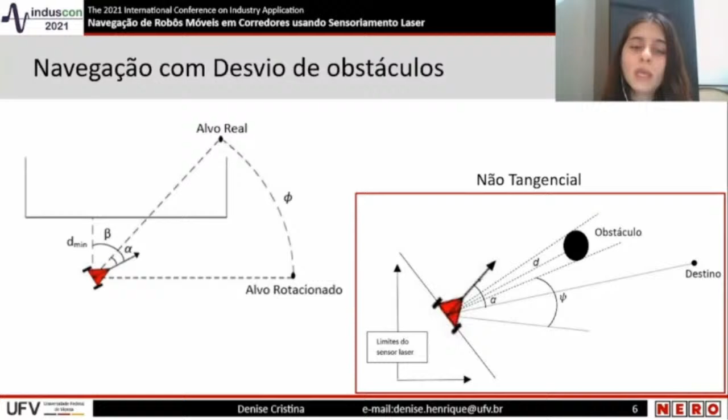Neste caso, as informações obtidas através da varredura laser são utilizadas para a determinação das regiões livres do ambiente. Será escolhida a região livre que possui uma abertura suficiente para a passagem do robô e que, além disso, apresente um menor erro de orientação em relação ao destino.

A emulação do sensor laser é realizada através do software MATLAB, levando-se em consideração o seu princípio de funcionamento, que se baseia no tempo de voo para a determinação das distâncias.

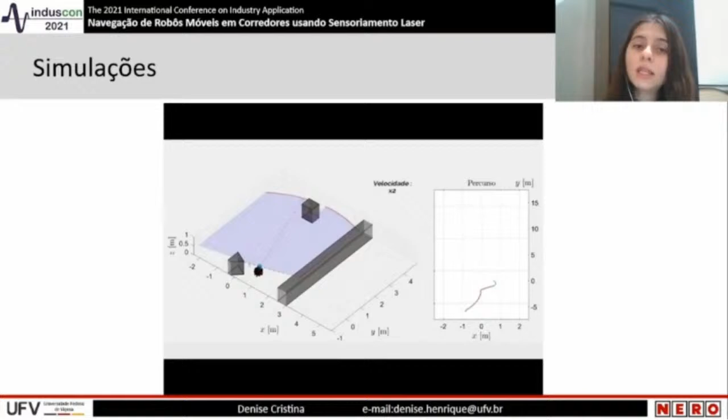O desempenho do sistema é analisado a partir das simulações, avaliando o comportamento das variáveis de estado ao longo do tempo. É importante destacar que espera-se que essas variáveis tendam assintoticamente a zero, evidenciando a estabilidade do controlador de navegação em corredores. Essa foi uma breve explicação do trabalho.

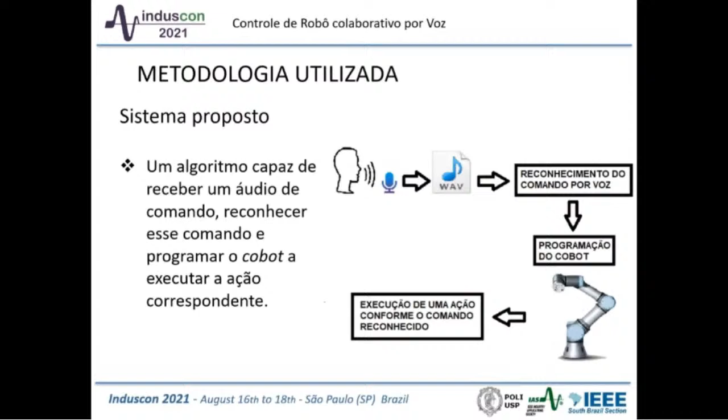O desenvolvimento do sistema proposto foi dividido em duas partes principais. A primeira, o reconhecimento do comando por voz, foi desenvolvido utilizando técnicas de aprendizado profundo, mais especificamente a CNN, a rede neural convolucional. Com relação à parte de programação do robô colaborativo, foram desenvolvidas quatro funções para controle do robô.

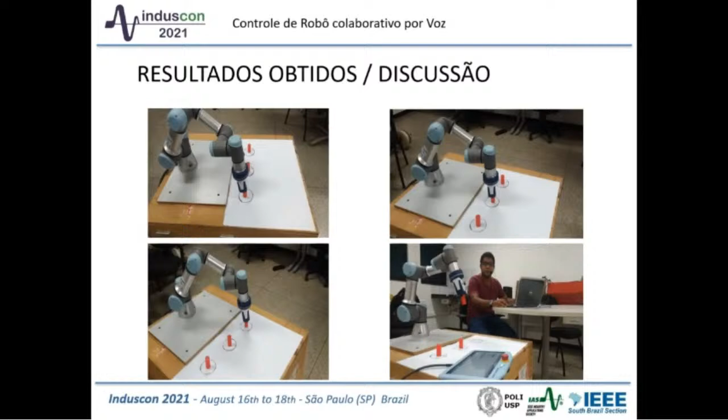Resultados. Durante a realização dos testes experimentais, como está demonstrado aqui nas figuras, foi possível observar que o sistema funcionou conforme esperado, ou seja, o sistema de controle proposto obteve êxito em reconhecer os comandos de voz corretamente e programar o cobot a executar a ação correspondente.

Conclui-se que a utilização de um sistema de controle por reconhecimento de voz pode tornar a programação de um cobot mais intuitiva e dinâmica, ao mesmo tempo que acrescenta o elemento com consciência humana no ambiente colaborativo.

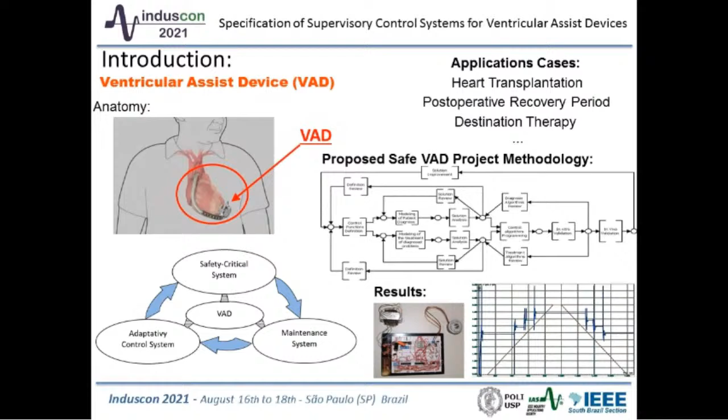Sensors to indicate blood pressure, blood flow, body temperature and cardiac frequency are necessary. To build a robust ventricular assist device, the proposed methodology uses HACCP methodology to declare the scenario and find potential risks. Concepts based on Bayesian networks are used to model the patient diagnosis algorithm. Petri nets are used to generate the ventricular assist device control algorithm, and safety instrumented systems ensure the device's system security.

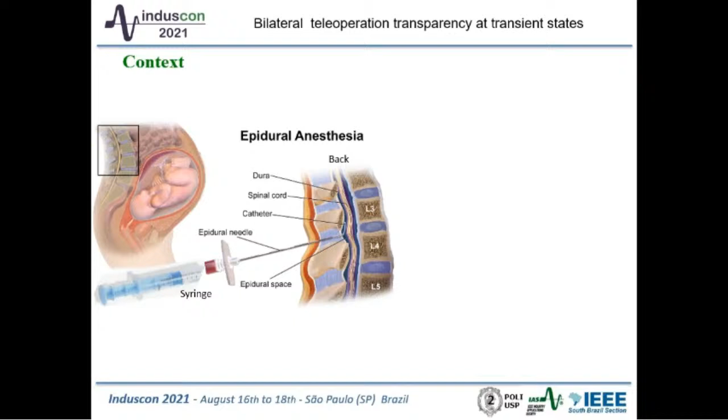Let us talk about the context. To perform an epidural, a needle is inserted through the patient's skin and guided between the patient's vertebrae to the yellow ligament, which is resistant. We want to enhance the sensation of the anesthetist. Thus, we propose to use a bilateral teleoperation system, done with a back, a needle, a syringe, and an epidural space modelized by this tube.

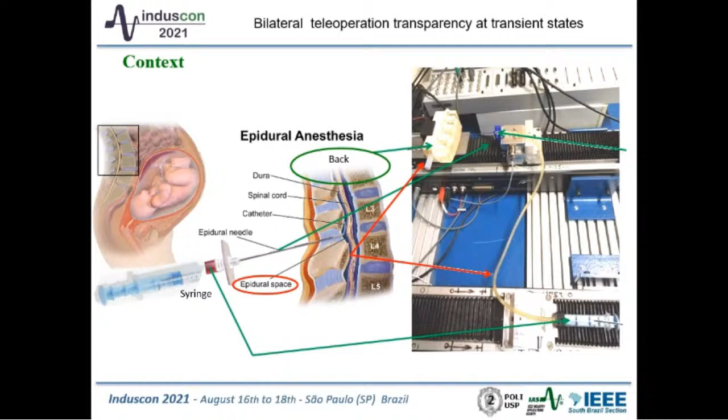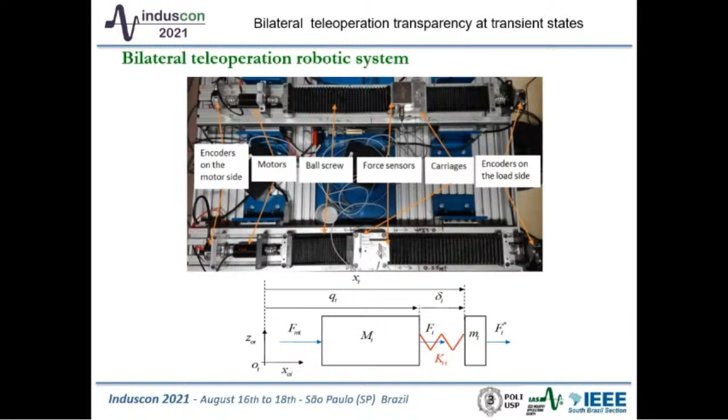In this presentation, we will not talk about the problem of needle insertion. The subject will be only about the bilateral teleoperation robotic system. This system is made of two similar robots. The modelization will be explained. Robot 1 is in contact with the operator, and Robot 2 is in contact with the environment.

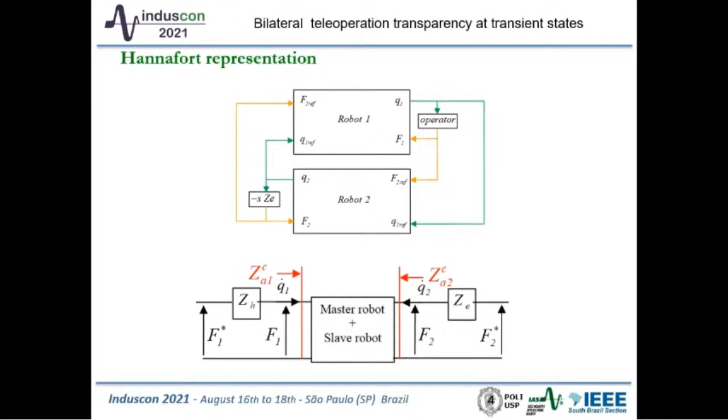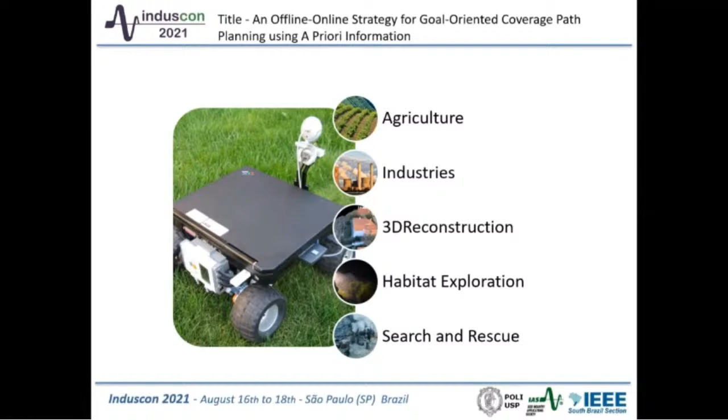Mobile robots in recent times have been used in various fields like precision agriculture, surveying of industries, 3D reconstruction, habitat exploration, search and rescue missions. In all these applications, at heart lies the problem of coverage path planning, which can be defined as a process of computing a path for a mobile robot such that it can explore every location in any given area. In recent times, there are many tasks like nuclear decommissioning, where the robot has to plan the coverage path and also reach the static target efficiently and effectively.

In this paper, we have proposed a novel strategy which has an offline stage as well as an online stage. In the offline stage, we take the architectural layout, which could be in the form of a grid map or a floor plan, and divide it according to the openings and construct a roadmap such that the robot can move from the start position to the goal position, also exploring at the same time.

The coverage path or the exploration path is computed in the online stage, where we build the occupancy grid from the given position. We extract the set of frontiers and select a frontier based on the roadmap where a set of regions are defined. Once the target is found, we stop exploring.

This novel strategy was evaluated using 3 environments in simulation. The first one was a nuclear site, which is the office of a nuclear site. The second is an environment proposed in the literature, basically a corridor which could be prone to debris in an extreme environment. The third was a floor shop, or an industrial manufacturing environment.

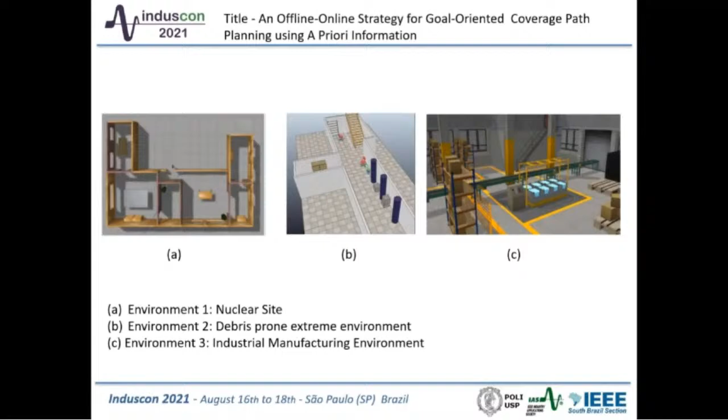We had explored various parameters. To sum up the basic results, we had seen that the coverage time increased for different environments, that is, as the number of regions increased or as the goal moved farther from the starting region, the coverage path increased. This is the crux of what we had done, in short. Thank you so much.

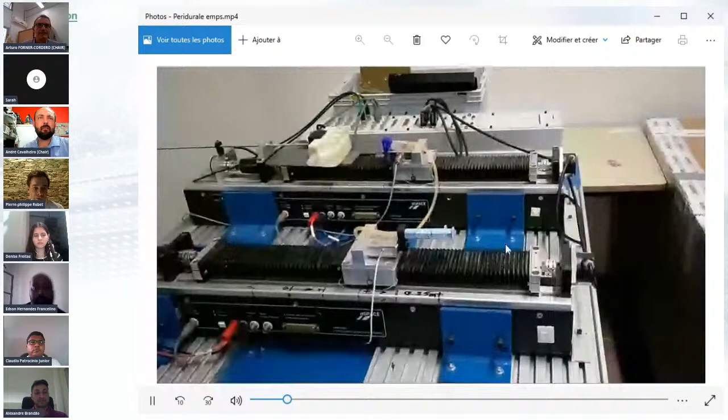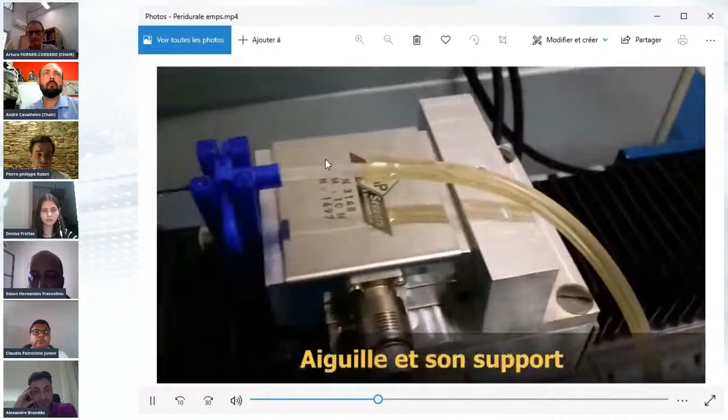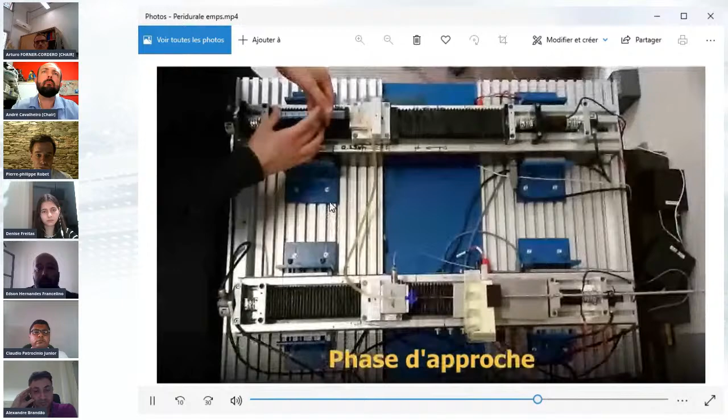So this is the presentation on the bench. We have the syringe which is fixed on the sensor. This is the master robot here, and the master robot is linked with the tube to the slave robot. And on the slave robot, we have the needle which is fixed on the sensor. And here we have the model of the back. And this tube, which connects the two robots, is used to modelize the epidural space. So as you can see here, we check the pressure of the air. And now we are doing a peridural, an epidural. You can see the needle go into the back, and when you are in the epidural space, you can push the piston. And we record the data here with MATLAB and Simulink.

Okay, this is the end of the video. So now you have a better idea of what we are doing. In the paper I presented, I was only speaking about the robotic part, because there is also a problem about needle insertion. Now we are working together on the robotic part and the needle insertion.

So the sharing is finished. Okay. Oh, very good, Pierre. Anybody have a question?

I have one question. This system, can you operate it remotely, or do the robots have to be in the same room together?

No. Presently, our system is not able to work remotely, because when you are doing a haptic system remotely, there is a problem of delay, time delay, and we are not at this level. Presently, we want the robot, the master and the slave, close together, less than 10 meters maximum.